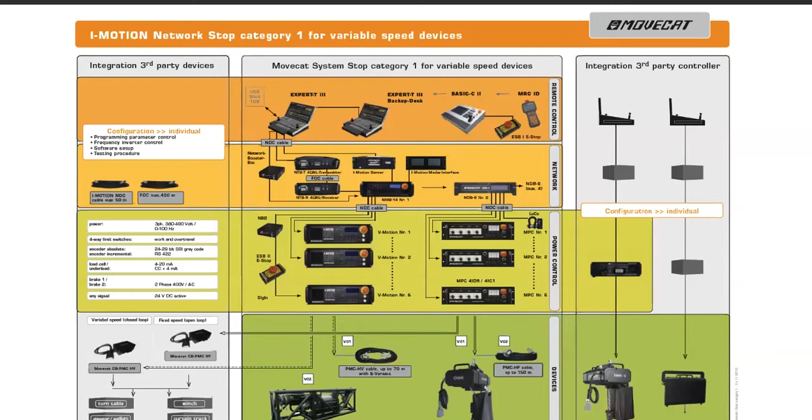Okay, so a little bit of explanation. D8, what is D8? I will read aloud what it's saying. The D8 electric chain hoist is a regular electric chain hoist equipped with a brake and can be loaded with 100% of the rated capacity specified on the electric chain hoist.

Okay, so the electric chain hoist is not allowed to be used to hold overhead loads during the use. No persons are to be present below the loads, as no secondary measures are there. This is what we call D8, so the BGV D8 situation. As we go on with the presentation, we go on to the higher standards, and I will explain accordingly.

Well, we have the basics, so the D8 hoists. Amongst them is an Ecolite, and the Ecolite has one brake. So as you are used to a normal hoist, this is what a normal hoist has. It has a slip clutch, it has one brake, it has an electrical motor, all the standard things that we know a chain hoist should have.

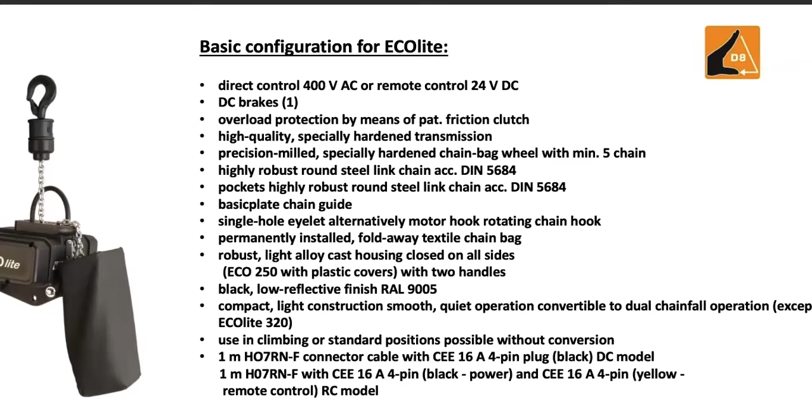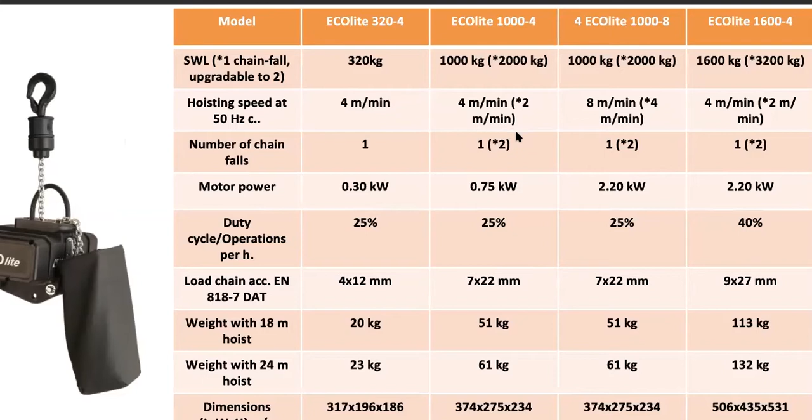These are the various models there are. So 1 ton, 8 meters a minute, and 1.6 tons, 4 meters. The hoists can also be equipped with additional options. There is for example a motor hook, or a swivel hook, or a fixed eyelet. The speeds are, depending on the model, 4 or 8 meters a minute.

So there's a lot of possibilities you can add to your D8 hoist. You can also add limit switches, load cells, etc. This is just a basic hoist. Yeah. Okay. Like I said, there are various models.

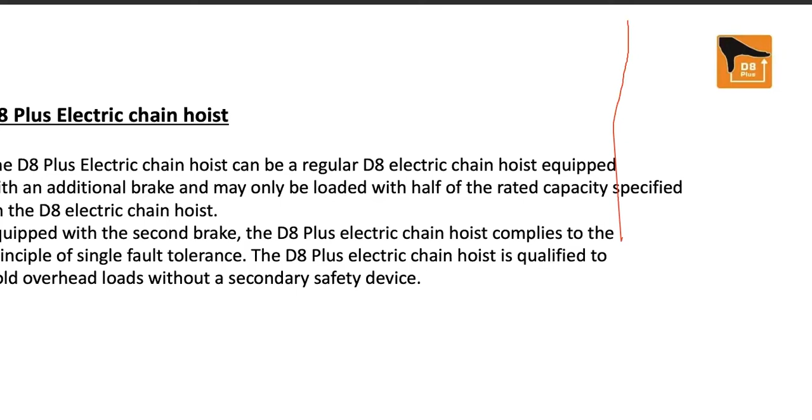So going to one of the models called Up Plus. So what is the difference? The Up Plus is suitable for use in a D8 Plus situation. So this comes with 2 brakes and is set back to 50%, so it cannot be loaded more than 50%. So the D8 bare hoist, if for example it is 1,000 kilograms, you're not allowed to put more than 500 kilograms on the hoist to meet the D8 Plus standard.

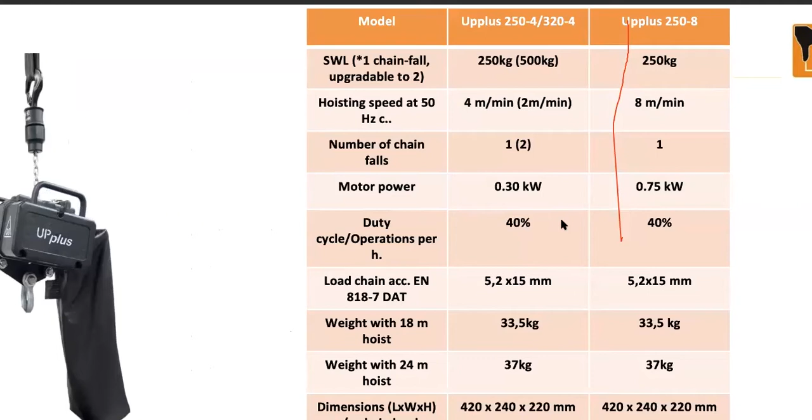So there are various models again available: 250, 320, 250, 8 meters per minute. Again, there are accessories possible: an additional limit switch, load cells can be integrated, and manual and electric trolleys can be added.

Here we go. Another model is the Plus Light. This is also a standard D8 Plus hoist. So again, to simplify it, this is a hoist to double your safety factor. That's actually what we're doing here. So there are 2 independent brakes, overload protection by means of a friction clutch, and all those kinds of things to make a hoist suitable for D8 Plus.

Now, to make clear, in Germany this is a law. In the rest of Europe, there are regulations that have a similar compliance to these regulations. And outside of Europe, a lot of people use the German regulations or the European standard as a guideline for their use. But please note that this is not obligatory or law in countries outside of the EU.

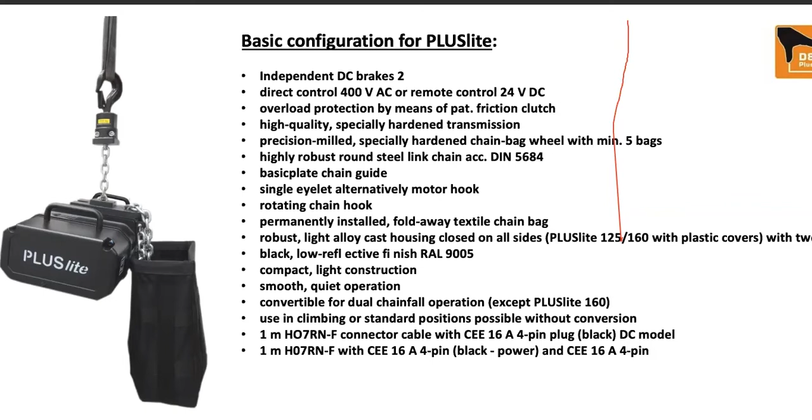Some technical data. The Plus Light is 160 kilograms, 4 meters a minute, 500 kilograms, 4 meters a minute. So these are all fixed speed hoists, just to give you an idea. Like I said, we're not going too much into detail because there are a lot of things we can talk about. I just wanted to show you what we can offer and what is possible with certain models of hoists.

Again, there are a lot of options and accessories possible. Again, a double brake, an encoder, or a secondary limit switch. 2-speed control is also possible.

Going to the next slide, we have the Pro Stage. This hoist is designed for use on stage, because this is a standard D8 Plus hoist. So this is actually a D8 Plus 1 ton single reeved. So why is this so special? Because

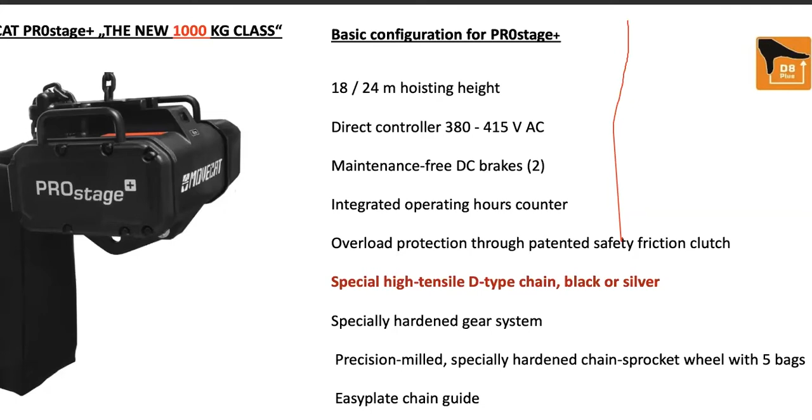Single hole suspension eyelet, rotatable chain hook, permanently installed fold away textile bag, robust light alloy housing with 2 handles. As you can see, it's quite a compact hoist. Movecat is quite known for their compact hoists. Some technical data: the motor is 1.1 kilowatts. It has a duty cycle of 40%. And it's 4 meters a minute. So this is your typical workhorse.

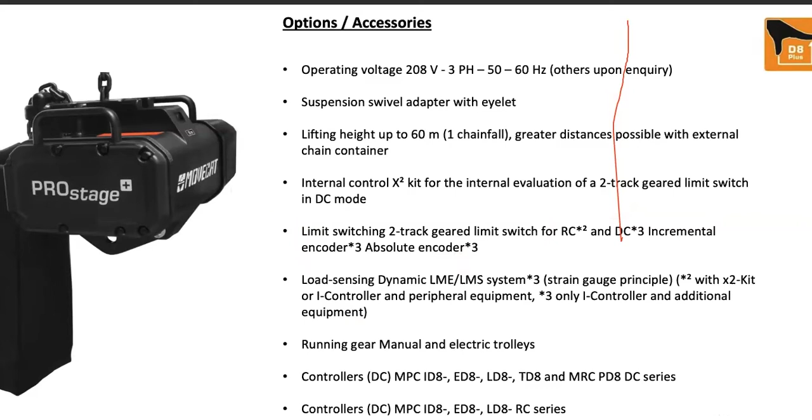Again, accessories can be added as with the previous models. And one feature I like about this hoist is it has an integrated hour counter. So you can actually read from the hoist. This is a display picture; this is not the case in real life. On the cover, you can see how many hours your hoist has been operated.

This can be really beneficial for rental companies, because you can charge your customer based on the hours that the hoist actually operated. So, for example, if you rent it out for 4 hours and they use it for 24 hours, you can charge them for 24 hours. And you can see how many hours your hoist has been running, and based on that you can increase the service frequency.

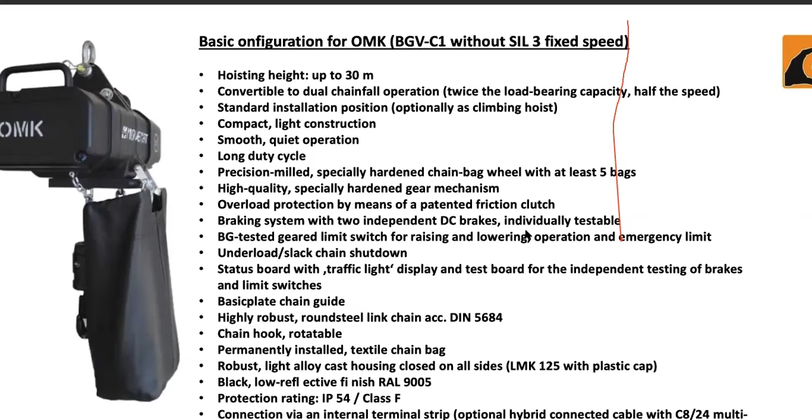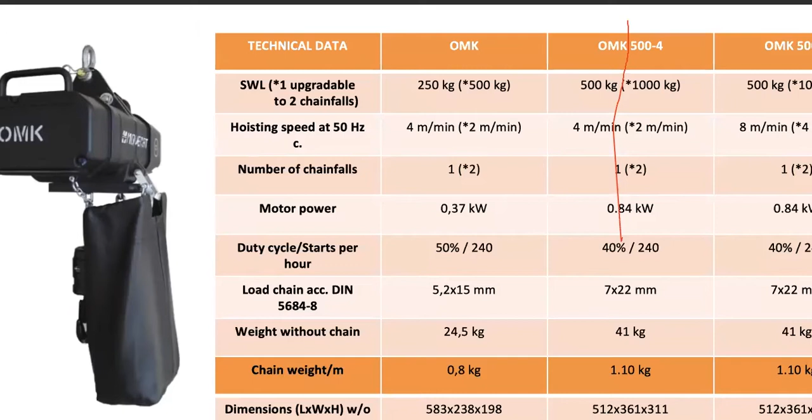Some technical data. There are again various options possible for this range. Options and accessories. If you want more information later on, you can contact Sahil and then he will pass on the information.

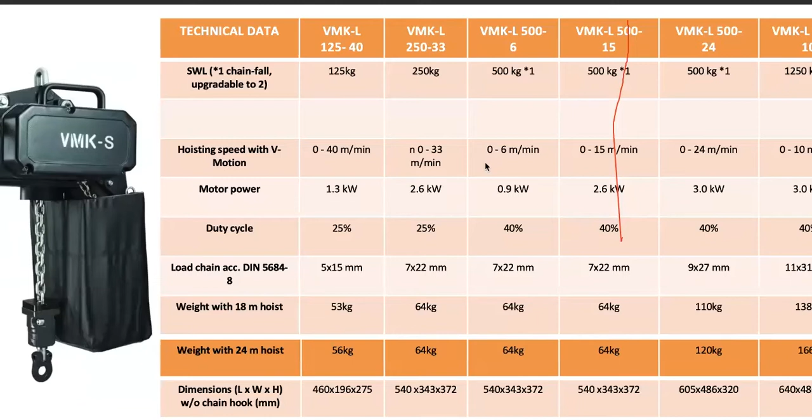As you can see, there are a lot of options available. There is a VMKL, there is a VMKS, and the S is for silent. The L has a little louder brakes, so it depends on where you are and where you can save some money here and there, depending on your project.

VMK variable motion power pack, the V-Motion. The cable is quite special. It's a hybrid cable. There are power cables and signal cables running through it. All the cables are specifically manufactured for Movecat for this product. And these cables ensure smooth operation for your system, because a lot of problems occur by using wrong cables or damaged cables. Okay.

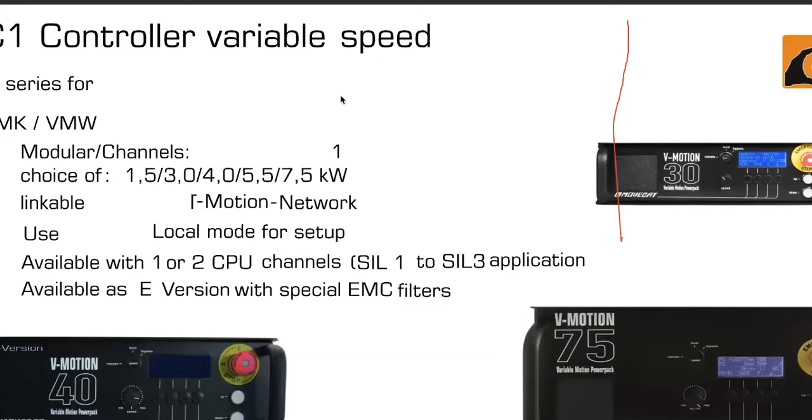Okay, the controllers. The V-Motion is the controller for a variable speed or a fixed speed VMK hoist. Next to that, there are some models of controllers, which are used for D8 or D8 plus, with encoders or no encoders. These are the controllers that can be used in D8 or D8 plus installations.

The controller on the right bottom can be used in what we call the I-Motion network. The I-Motion network is a network we can connect controllers or V-Motions onto, which you can see on your desk. So as you can see, there is a wide range of products, from D8, basic standalone installations, to motorized systems such as the variable speed systems.

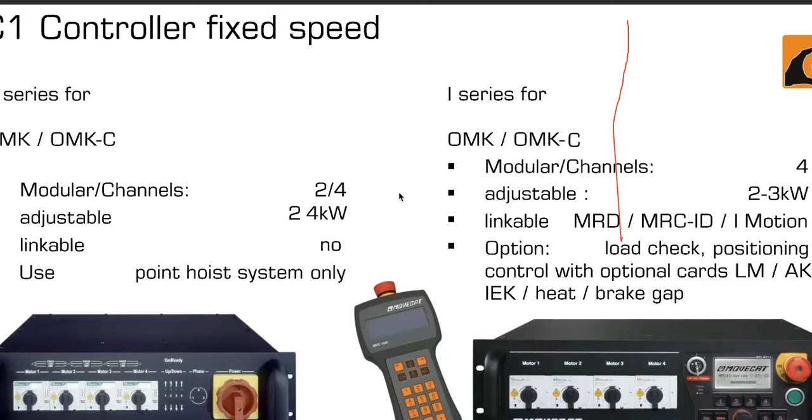This is required for extra safety. In case one fails, the other is what we call redundant and will kick in when the first safety is not working. This is all again coming back to reducing risks as much as possible.

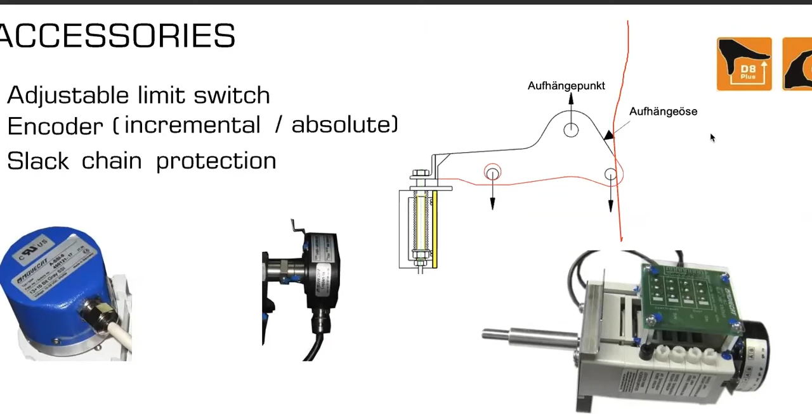Okay, well, we have some cabling available, splitters.

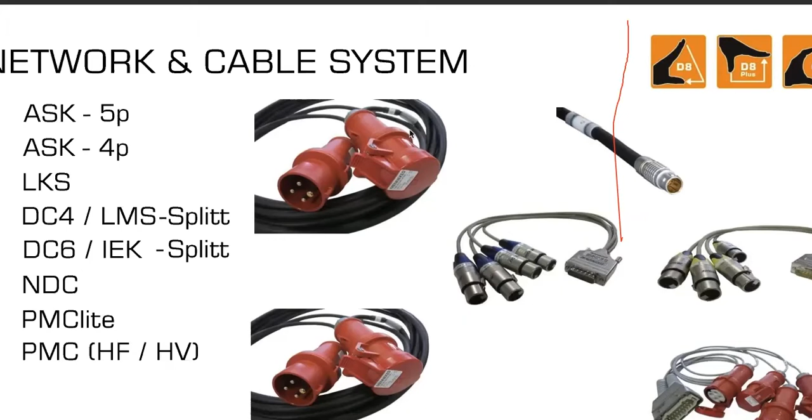Can I? Sorry. Yeah. As you can see here, this is what we call the NDC cable. The NDC cable is the cable that is between the vMotion and the desk. This is also used to link vMotions and also from the routers, what we call the NMB, the Network Master Box, and the NDB is the Network Distribution Box, which we can see again in the flow chart. I can get it later on.

Movecat also has power distribution units. In some cases, people can make them themselves, but if you have a system with variable speed drives from Movecat, we always strongly recommend to also include a power distribution unit in your system. Why? Because this power distribution unit has a special RCD, and a special RCD is type B.

What is so special about a type B? The RCD type B is specifically designed to be used for variable speed hoists. A normal RCD type will trip all the time because it can't handle the frequency drives and the peaks that will occur when you have a frequency drive operating. To be honest, these things are quite pricey, but these are essential to have your system operate flawlessly.

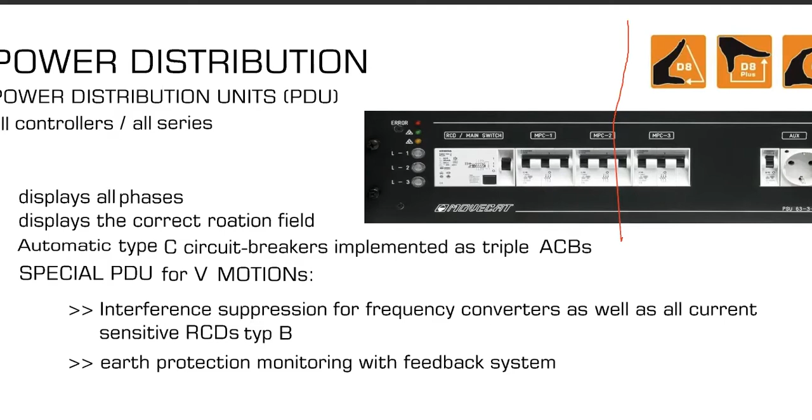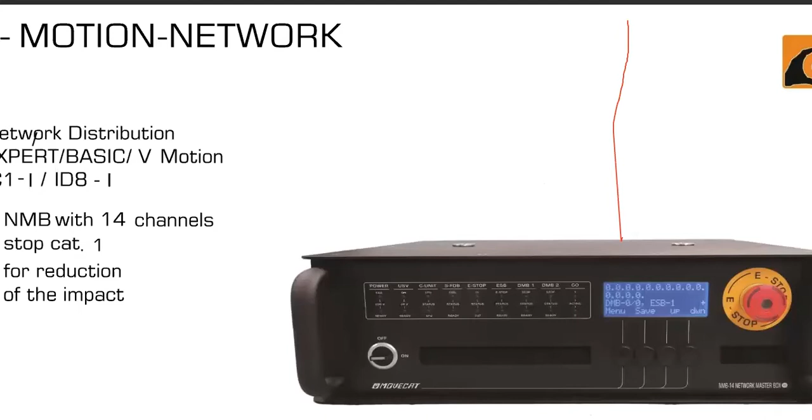This is the NMB. So in every system for variable speed hoists, this box is the first in line. So this is the first in line that is connected to the desk. The NMB 14 means it has 14 channels, meaning you can connect 14 vMotions. If you want to have more channels, then you always need an NMB 14, and then you can connect 14 NDBs.

NDB boxes. And every NDB box has another 6 outputs. So depending on the amount of your drives, you can connect, link, actually NDB 6 boxes. If you have a great distance to cover, we have a booster box over here, which boosts your signal.

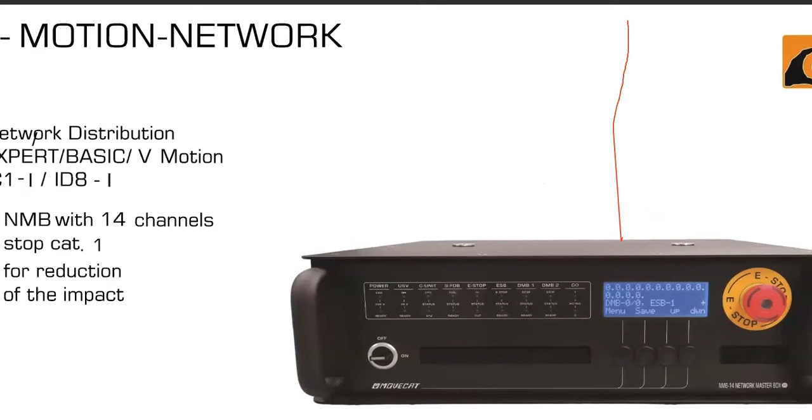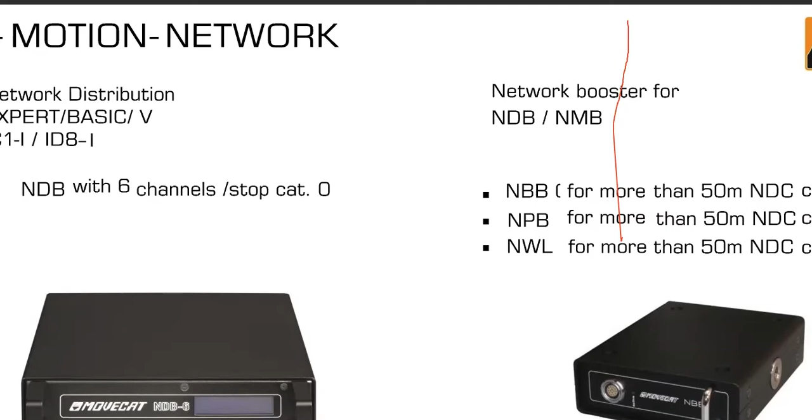What is so special about the NMB 14? As you can see, this is a 19-inch distribution box, which is almost the same size as the V motions, also 19-inch, and the NDBs are small boxes, and this is just a simple distribution box for the vMotion network. Again, what is so special about this box?

What is special about this box is that it has a stop category 1, which means that if you press the E-stop on your system, normally if you have a plain D8 system and you have 20 hoists and they're 1 ton each, you have a total load of, to keep it simple, 20 tons. If you press an E-stop on a moving system of 20 tons, your roof will come down, definitely.

The NMB 14 has a function inside which generates a 1 second delay if you have to press the E-stop. Any E-stop pressed, the NMB 14 will engage the stop category 1. So it also serves for reduction of the impact. You can also use your system without the NMB 14, but you won't have this functionality. And we always strongly recommend to have this first in line.

In case an emergency stop is necessary, this will reduce the impact with 1 second, which can save your roof.

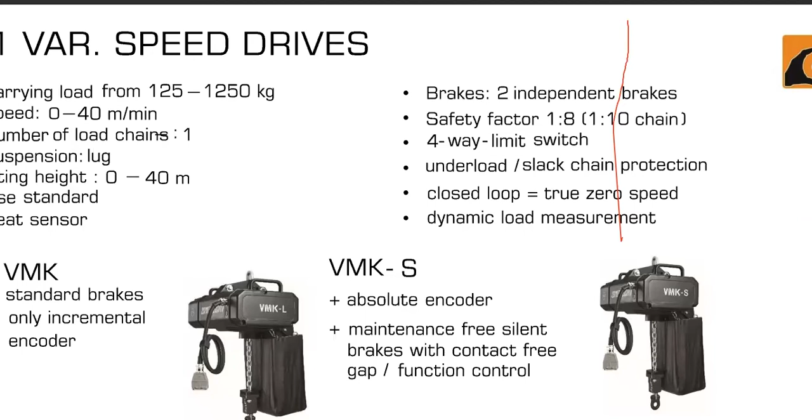There is a suspension lug, again with an eyelet, to maintain the safety factor. Heat sensors, as I already told, 2 brakes, 1 to 8 and 1 to 10 on the chain. A 4-way limit switch, so a redundant limit switch, underload and slack chain protection, etc. So the VMKS is as high as it gets.

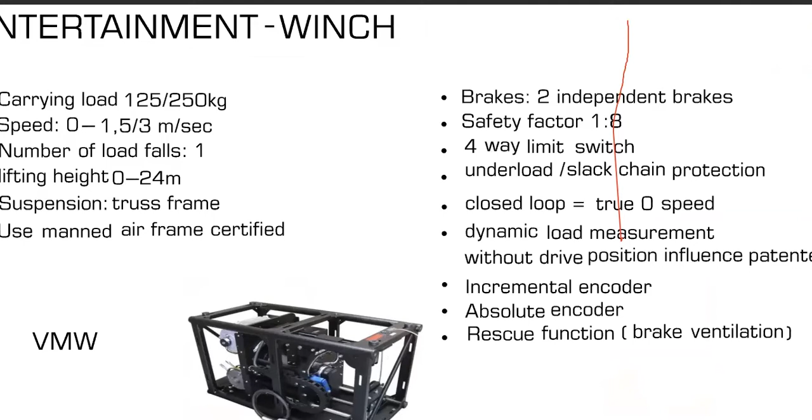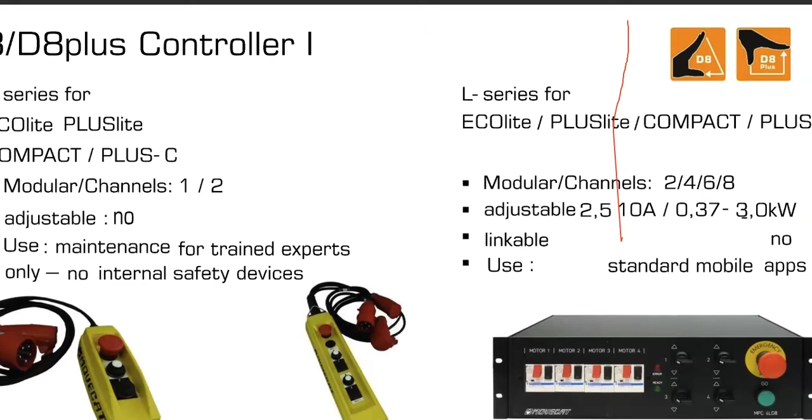Well, there is a winch, the entertainment winch. That's why we call it drives, because there are a lot of drives possible. Trolley is available, and now go to the controllers. The controllers, D8 and D8 Plus controllers. So in the same order as we go through the hoist, we have pickles available. We have simple hoist controllers available. Going up to more options of functionality.

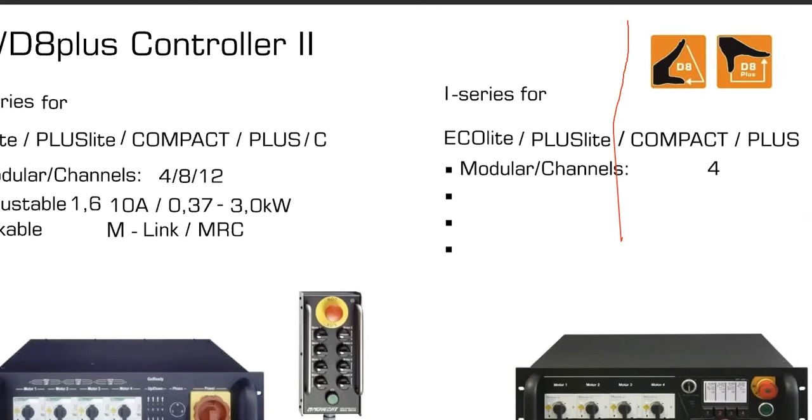As you can see here, this is a controller with a remote, and here we have a controller with a display, which can receive signals from a load cell, which is optionally put on a hoist, or encoders for positioning, which are added later on to a hoist. Now, this is actually one of my favorites. This is what we call the touring rack.

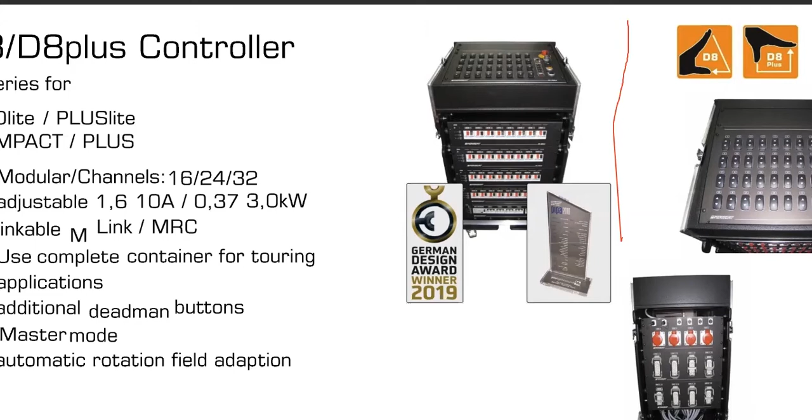There is a master mode, automatic rotation field adaptation. So it doesn't matter what you put in, the output is always the same. And oh yeah, it's not in the slide, but there is also a bypass function. If there is one hoist refusing to do its job, then you can bypass that hoist instead of shutting down your whole production, taking out the faulty hoist and putting one back in. If you can bypass that broken down unit, your project is not in jeopardy.

Well, this is it for the Movcat part. There's so much more I want to tell, but this is for now what we promised, a basic introduction on the Movcat. Please note that this is not all there is. There are more things, but like I said, this is in a nutshell what we can offer on D8 BGVC1 to the highest safety level of variable systems.

De volgende presentatie. Now I'm gonna tell you something.

So we have a range which is called Protoss range load cells. One moment, please. We're switching over to the other presentation.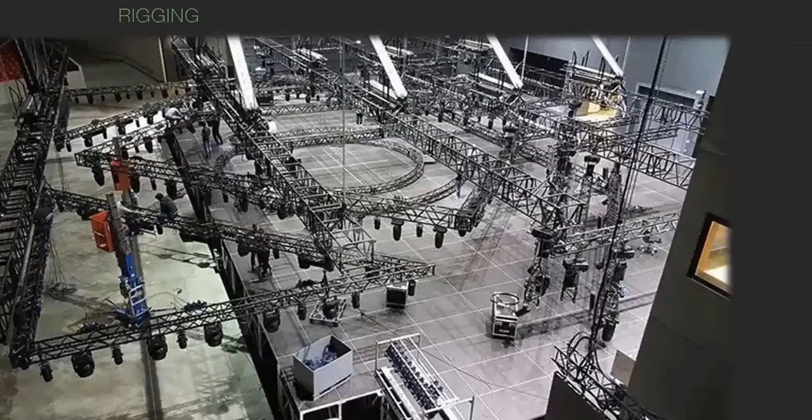So like this picture, you can see that this is quite a rated installation, and it would be highly recommended to use load cells to be able to measure what you are doing and what is happening where in your construction. Another view.

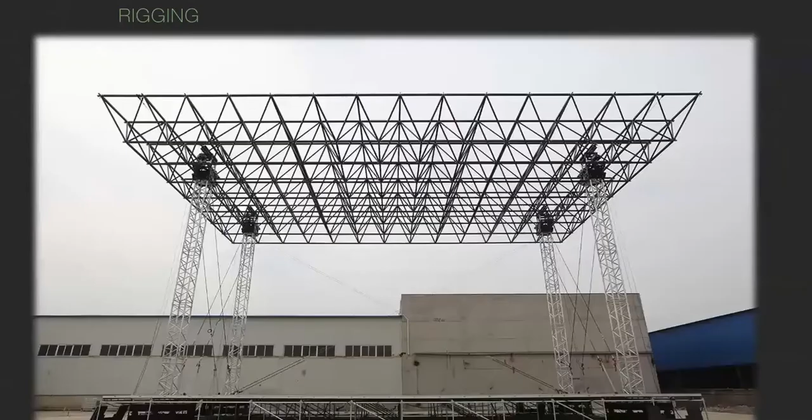So, unique features. Protos has developed a comprehensive range of force equipment for the entertainment industry. The load cells have a centralization bobbin, meaning the load will always be in the center of the load pin. If it's not in the center of the load pin, pushing against the shackle bow, then the force will also be transferred through the bow, which will not give the pin an accurate reading.

It's a plug-and-play system, customizable visualization in software, and local stock available. Later on in the presentation, I will have some screenshots to give you an example of how it looks and what we can do with it. European quality, long-lasting battery management. You can also data log; I also have some pictures of that.

So what is a load cell? Well, actually a load cell is a cell that measures deviation in material. In this case, this is a load cell shackle. Like I explained before, we have a plain shackle. We all know what a shackle is. It has a pin, not a normal pin, because in the pin there is a strain gauge. In the next slide, I will explain in a nutshell how it works.

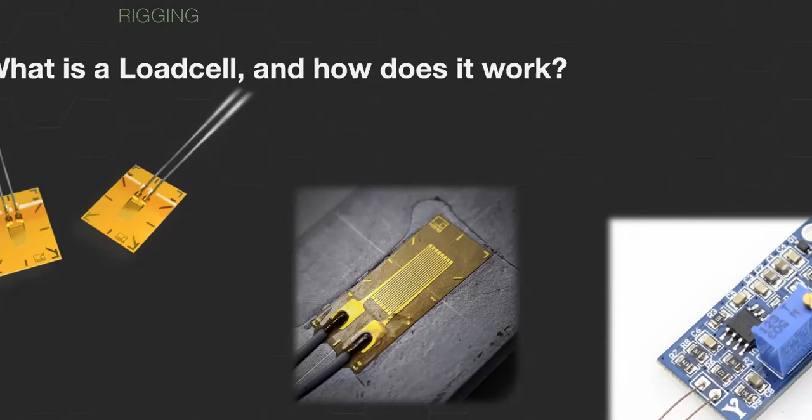This signal is transferred from our wireless load cell to the dongle we have. We have the set in the back, and this is a USB receiver which receives the signal from the load cell. Well, there are pros and cons on wireless and wired. I think we can all relate to the pros and cons.

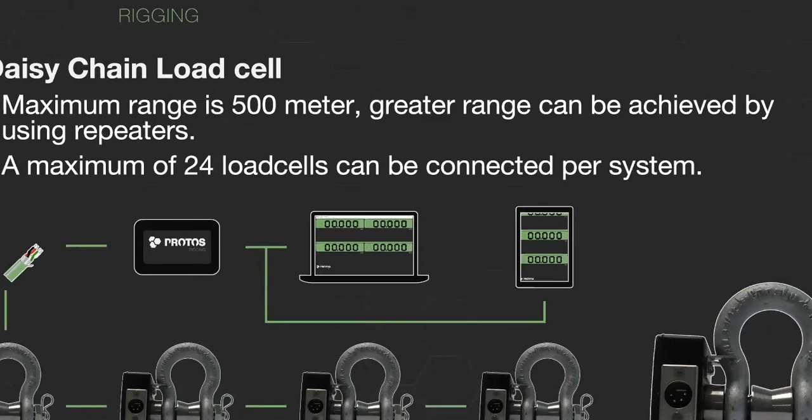Standard ranges we have are 3.25 ton and 4.75 ton. We have a daisy chain load cell system available, which is custom made. The wireless is 3.25 and 4.75, stainless steel, IP67, so it can be used outdoors. Long battery life, possible with different transmission rate settings. So we have a monitoring software system, and we have a configuration software with toolkit.

Custom options are available. So besides the 3.25 and 4.75, if you have any inquiry, don't think it's not possible. Just always ask if it is possible, because there's a lot of custom options available. The battery life is up to 650 hours. The batteries inside are AA batteries, two pieces. Like I said, we have the dongle, 500 meter range. The extended box is 800 meter.

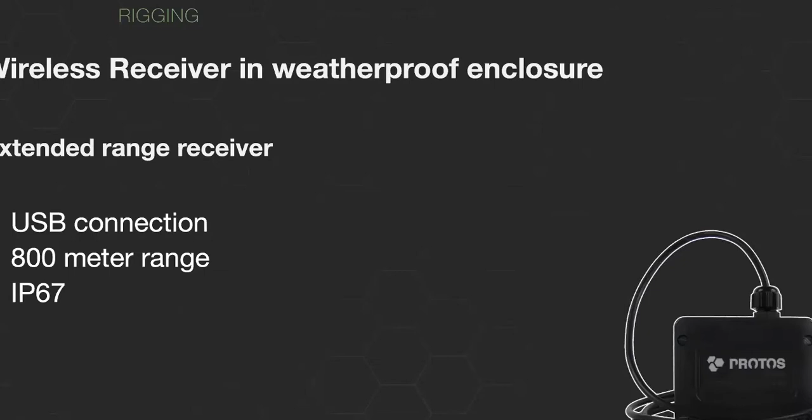We have a wireless handheld receiver, which can be used as a standalone unit to scroll through your available load cells, because this will pick up the signal from every wireless load cell in range. As soon as you turn this on, it will turn on load cells within the range.

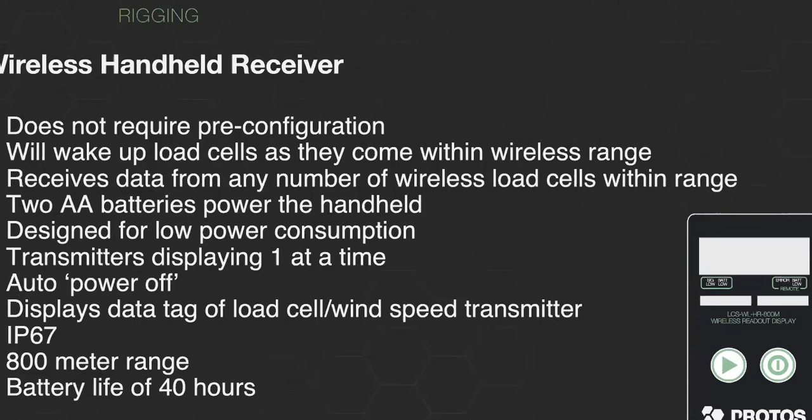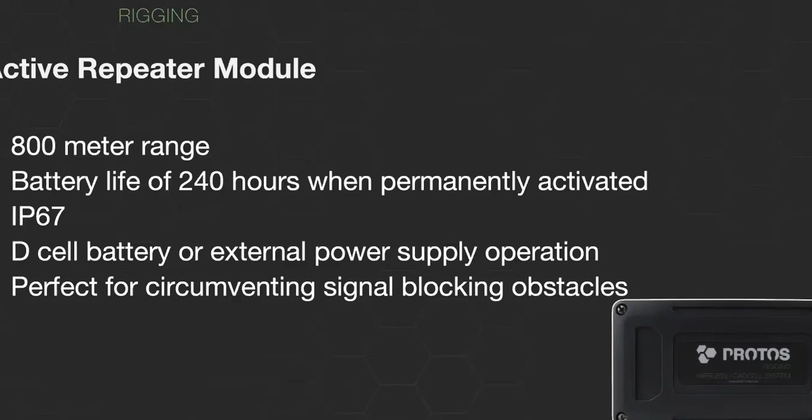We also have an active repeater module. So why would we use this? If we need more range, or if there's interference, you can enhance your signal with this one. So it's not only to extend the range, but also to enhance the signal. Also perfect for circumventing signal blocking. So if you need to transmit around the corner, you put this on the corner, and then if you have a free sight, this will do the rest.

We have a relay module. The relay module is also a nice module, which can be set and work standalone without the software if you set the settings properly. The relay unit has the ability to connect a siren to it, or an alarm light, or you can even put the e-stop circuit from your controller through this, and it will either activate or deactivate the e-stop circuit from your controller, which will result in stopping your hoist in case of an overload.

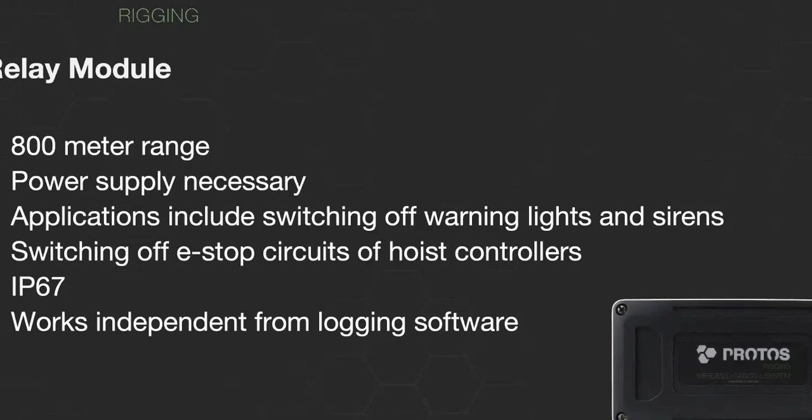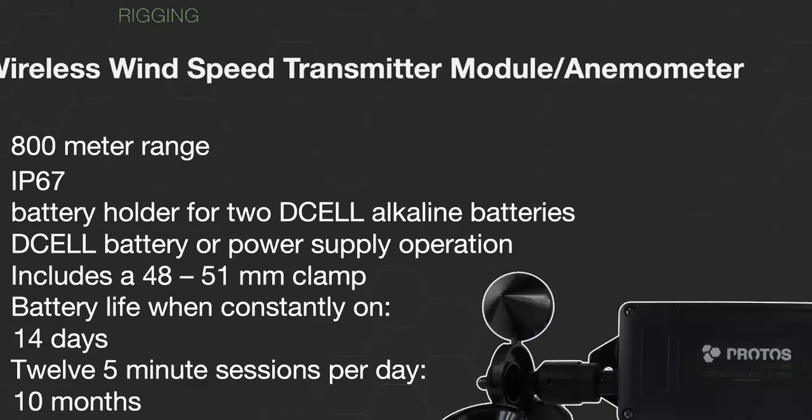We have a wind speed transmitter for outdoors, of course, the anemometer. This also has a lot of settings. Also for longer periods of time, if you have festivals over weeks, or you have a site where you need to monitor the wind for a couple of weeks, we have a solar panel and a power pack available for longer operation without fixed power supply.

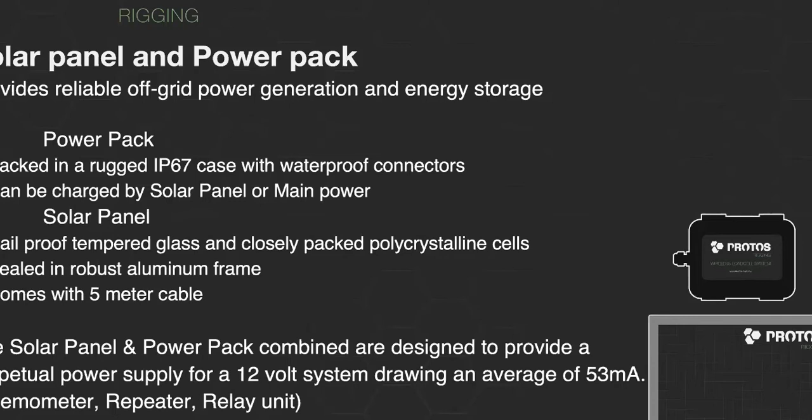We have a Protos flight case, a trolley design with interchangeable inserts, so you can carry a maximum of 16 load cells or 4 anemometers, or whatever your configuration is that day. So this is, I always like pictures, because pictures talk much better than text. This is how the wireless system works.

In the middle of this circle, we have the Windows laptop, computer, or Windows tablet, which you can connect the various models of receivers we have to. So in that range, you can see the different modules. If you want to extend that range, you can use a repeater. The repeater does not need to be set, and then it will repeat the signal. The signal, by the way, is 2.4 gigahertz, and no, it will not interfere with other 2.4 gigahertz networks because it will identify.

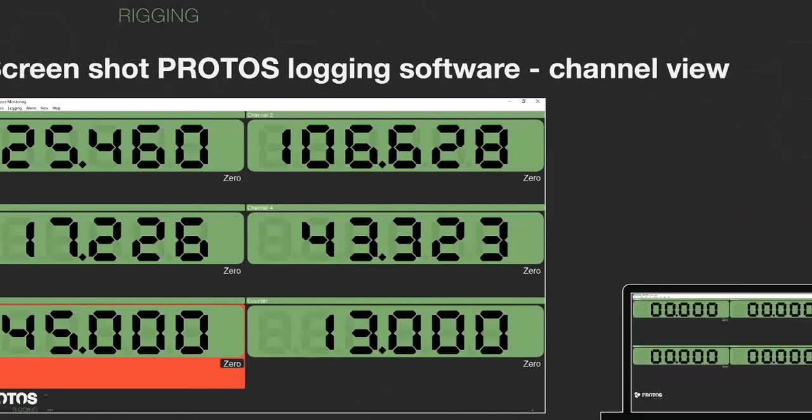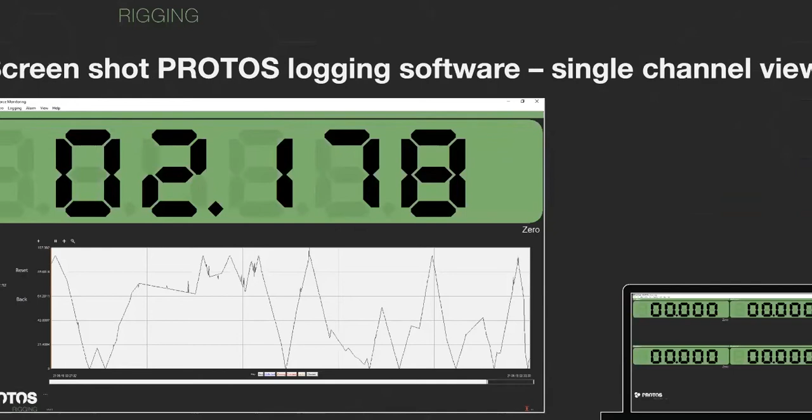This is something I kind of like because, for example, if you are on your software and you have a project, in some cases visualization is much more comforting, much easier to look at, rather than having your channel view with a name where you always have to look for your load cell. So

you can put any bar, any display inside your picture, your PDF, whatever you want to upload, and then you can say, hey, the hoist in the back left is overloaded, rather than hoist 4 or hoist 1 or whatever is to your liking. You can change it into any shape, any color. You can add

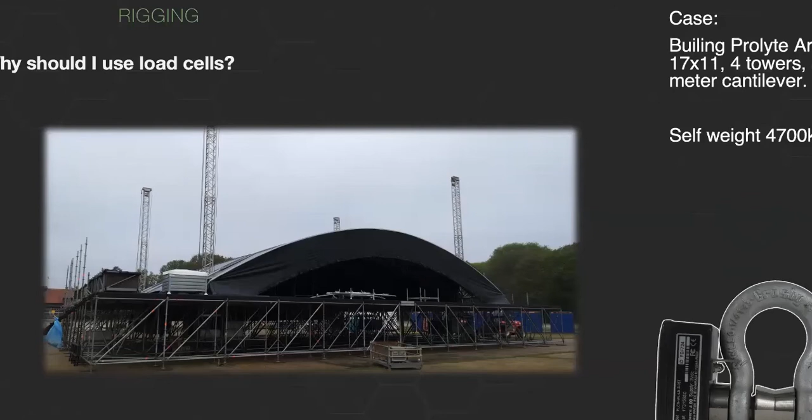So the exciting part is, why should I use load cells? So this is a case. It's an arc roof of 17 by 11, 4 towers and a 2-meter cantilever on the front. The self weight of the roof is 4,700 kilograms. Okay, so what is important, as I also explained about the centralization moment, if you're using a load cell, you always have to make sure that the load cell is in a straight line with the load. So this is how to install a load cell.

Now, actually, I was with an old colleague of mine. I called him up. I said, I want to see this for myself. So actually, one day later, he called me back and said, "Hey, we have a gig." It was a liberation festival in Groningen, near a village, and he said, "You can come over and we'll put them in between." He said, I want to see it as well.

So the previous picture, this is how I set up in front of the stage, because it needed to be raised and it needed to have tarps on the backside and left and right side. So first, I write the ID number of the load cell on a piece of paper, so I can configure it in my software, so I don't need to run back and forth.

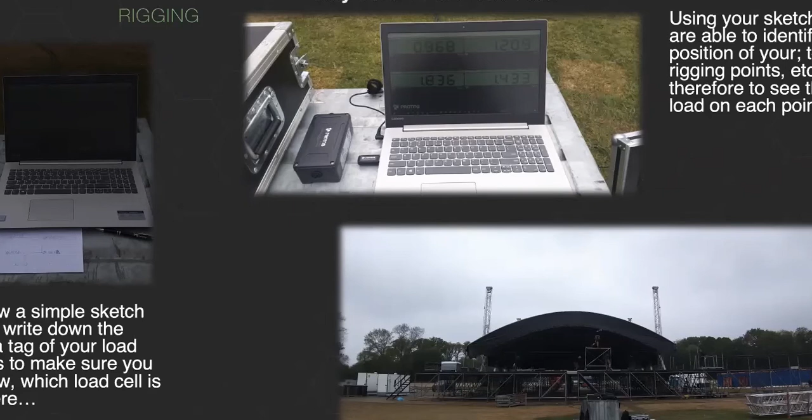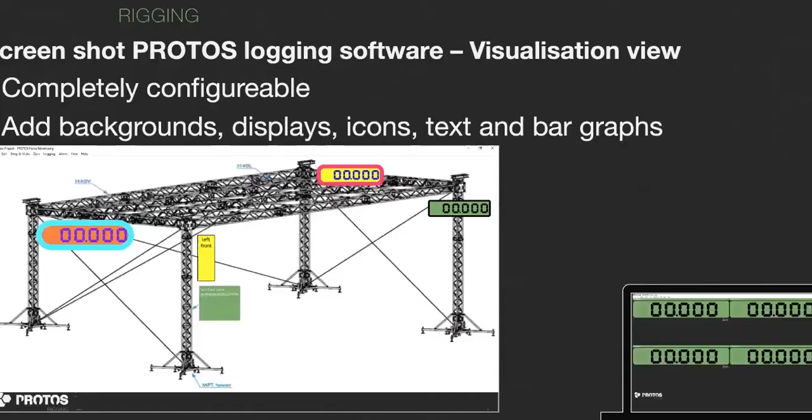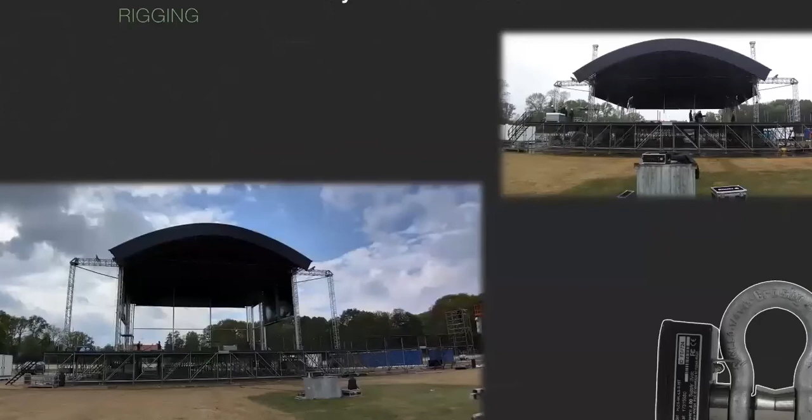So I was looking at my colleague and I said, "Hey, this is almost a ton over." And he was scratching his head like, I don't know what it is. This is strange. So we continued, because the people who were building it up were a different company, and they have been doing this for years. They had put up this same roof several times.

So here is a chart. So as you can see, this is what the software

So as you can see, the chart here on the left side, the cells A to G: A and B are the date and the time, and C, D, E, F, G are the displays. So my colleague generated this graph in Excel using the CSV file. So it's raw data, what our software puts out.

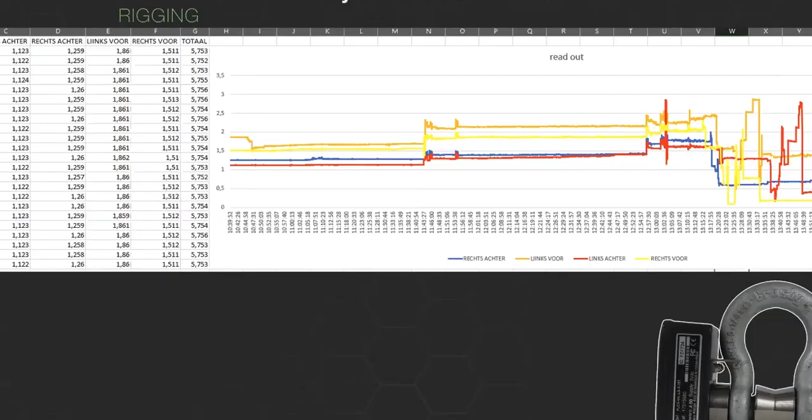What I forgot to mention is that these 4 towers each have 2-ton double-reeved hoists. So the capacity of each tower is 2 tons. It's not 4 tons, because the hoist is mounted to the base of the construction and not connected to the moving part. So each tower is 2 tons.